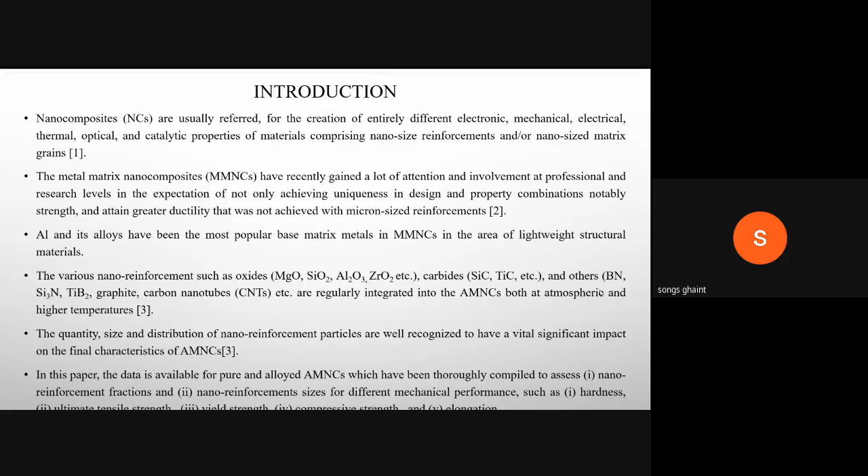And in carbides, we have silicon carbide, titanium carbide, and other reinforcements like boron nitride and titanium diboride. So the defect-free microstructure, particle even distribution, and good properties of MMC have made this matrix important.

Lightweight ductile aluminium is the most preferred matrix material. The reinforcement type, size, volume fraction, and hybrid reinforcement played a significant role in the progress of AMNCs. In this paper, data is available for pure and alloyed AMNCs, which has been compiled to assess the nano reinforcement fraction and size for different mechanical performance, such as hardness, ultimate tensile strength, yield strength, compressive strength, and elongation.

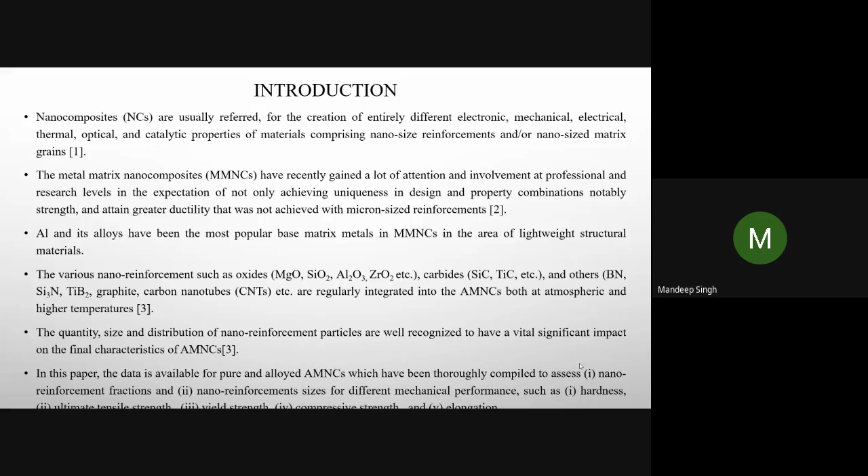So next, in the literature review, we are starting the mechanical properties with hardness. What is hardness? But before that, what are mechanical properties? Mechanical properties involve a reaction to an applied load that determines the range of usefulness of a material. The most common properties considered in this review paper are discussed next.

First is hardness. What is hardness? Hardness is the measure of a material's resistance to localized permanent deformation. The nano-sized reinforcement increases the dislocation density in the base matrix as per the proper particle size distribution. The higher the reinforcement applied, up to an optimal value, the more constraints on dislocation movement there will be. Hence, the overall hardness of AMNC will increase.

Poovazhagan and others revealed a progressive increase in hardness of AA6061-B4C nanocomposites by increasing the nanoparticle volume percentage as 0, 0.5, 1, 1.5, 2, 2.5, and 3. The strong bonding of aluminium with the boron carbide nanoparticle prevents dislocation movement, causing improved hardness to 91 BHN Brinell hardness at 2.5 volume percent nanoparticle, as opposed to 40 BHN of the base alloy.

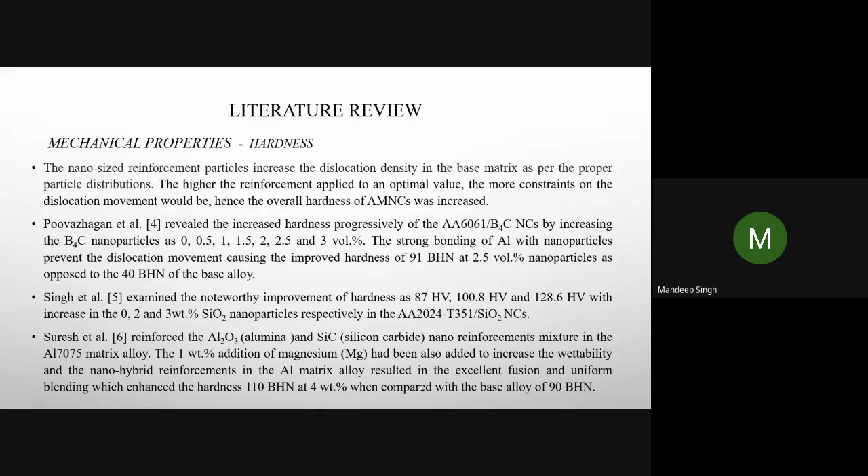Suresh and others reinforced an alumina and silicon carbide nano reinforcement mixture in the AA7075 matrix alloy. A 1 weight percent addition of magnesium was added to increase the wettability of the nano hybrid reinforcements in the aluminum matrix alloy, resulting in excellent fusion and uniform blending, which increased hardness to 110 Brinell hardness at 4 weight percent, compared with the base alloy's 90 Brinell hardness number.

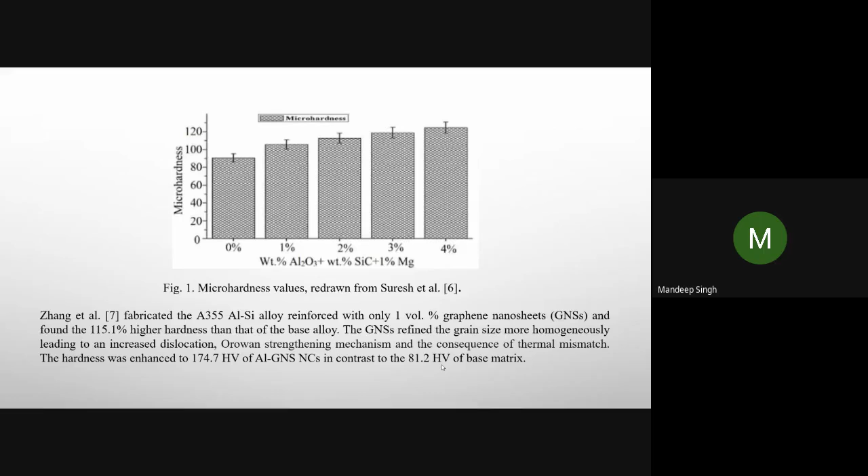Here is a figure which explains that as the weight percentage of nano reinforcement increases, the overall hardness also increases. Next, Zhang and others fabricated an A355 aluminum-silicon alloy reinforced with 1 volume percent of graphene nanosheets and found 115.1% higher hardness than the base alloy. The graphene nanosheets refined the grain size more homogeneously, leading to increased dislocation strengthening mechanisms and thermal mismatch effects. The hardness was enhanced to 174 Vickers hardness for the aluminium-graphene nanosheet nanocomposite, in contrast to 81.2 Vickers hardness of the base matrix.

Then we have the second mechanical property, ultimate tensile strength. What is ultimate tensile strength? It is the ability of a material to resist tearing due to tension, measured in pascals or Newton per meter square. It is found from published studies that the UTS of AMNCs has been strengthened by nano reinforcements. The tight intermetallic bonding causes improved wettability.

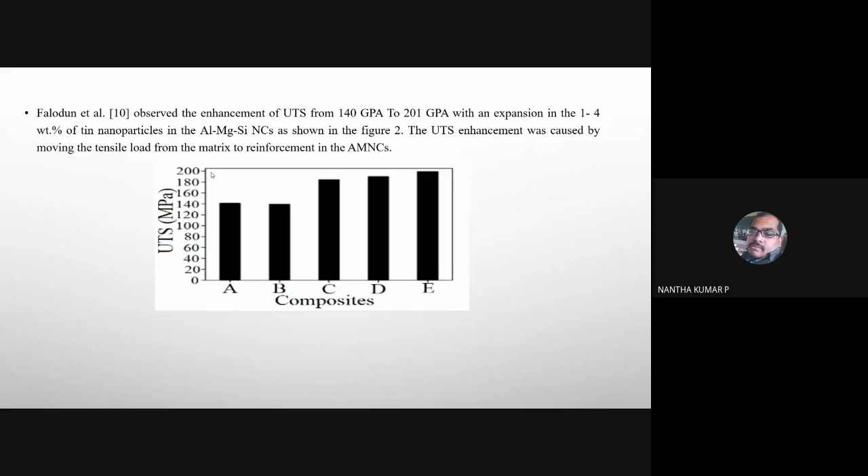Sorry, dear sir. Mandeep, sir, please conclude. Yes, chairperson advised 5 minutes for the presentation. Can you conclude, sir? Sir, it is a reviewed paper, so I have reviewed from different sources. No, no, 5 minutes for presentation, sir. Let others also present. Okay, let me wind up. Yes, please, please. Thank you, thank you, sir.

Poovazhagan and others indicated a 125% increase in ultimate tensile strength of the AA6061 boron carbide nanocomposite in contrast to the base alloy. The boron carbide nanoparticle improved the ultimate tensile strength at 0.5, 1, 1.5, and 2 volume percent.

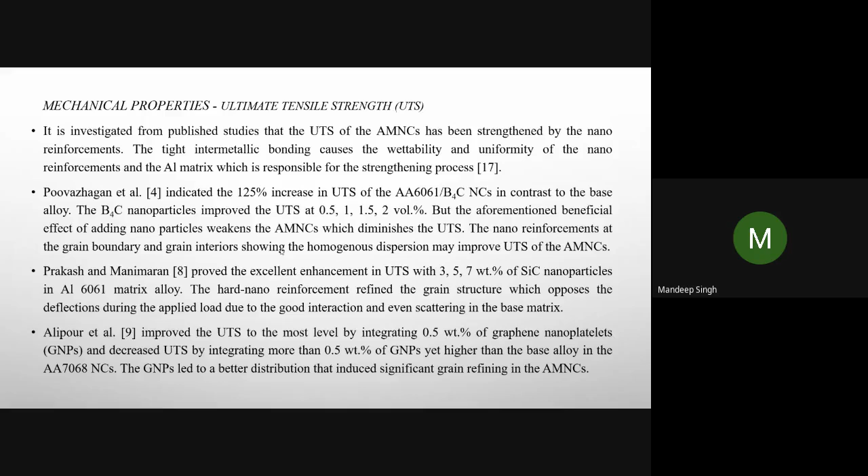The aforementioned beneficial effect of adding nanoparticles weakens the AMNC, which diminishes the UTS. This is due to the high dislocation density and the interaction of dislocations with the ultra-fine nanoparticles. The nanoparticles at the grain boundary interior show homogeneous dispersion, which improves the UTS of the AMNC.

Coming to yield strength - what is yield strength? It is defined as the maximum stress that a solid material can withstand when deformed within its elastic limit, or it can be defined as the stress at a point where the stress-strain curve deviates from proportionality. That is the yield strength of the material.

Li and others made use of titanium nitride nano-reinforcement particles by varying the weight percentage at 1, 2, 3, and 4 in the Al2024 alloy. The increasing titanium nitride content improved the yield strength up to 3 weight percent, and the maximum value was recorded at 2 weight percent, that is 730 megapascals, which was 185% higher than the baseline.

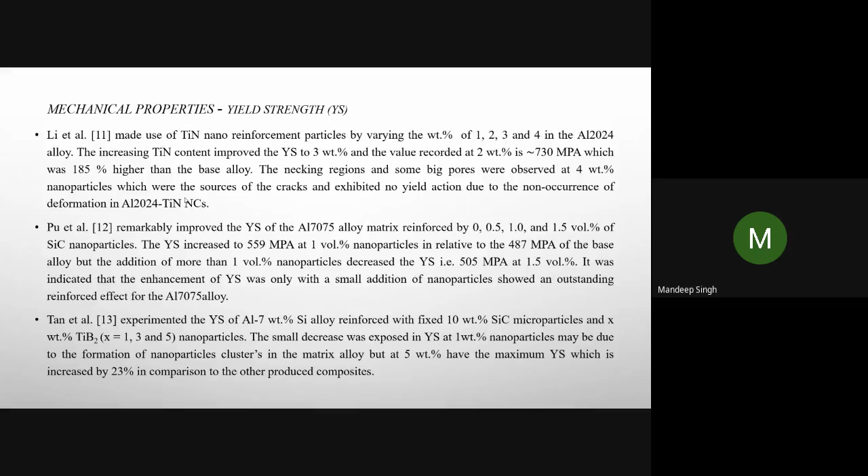The reason is that necking regions and some large pores were seen at 4 weight percent nanoparticle content, which become the source of cracks and show no yield action due to the non-occurrence of deformation in the Al2024 titanium nitride nanocomposites. Then the next mechanical property we have is compressive strength.

What is compressive strength? It is the maximum amount of compressive stress that a material can withstand before it breaks or fractures. Izadpur and others studied 0.4, 0.8, and 1.28% of aluminum oxide nanoparticles in the...

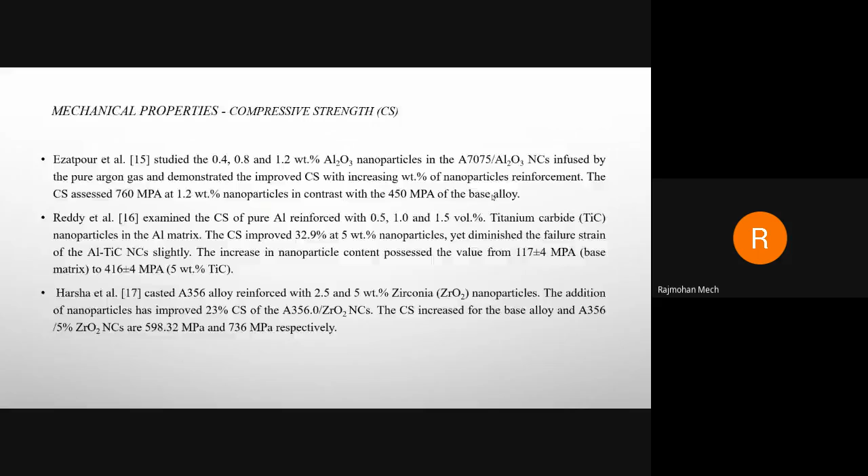Sir, please conclude yourself, sir. Okay.

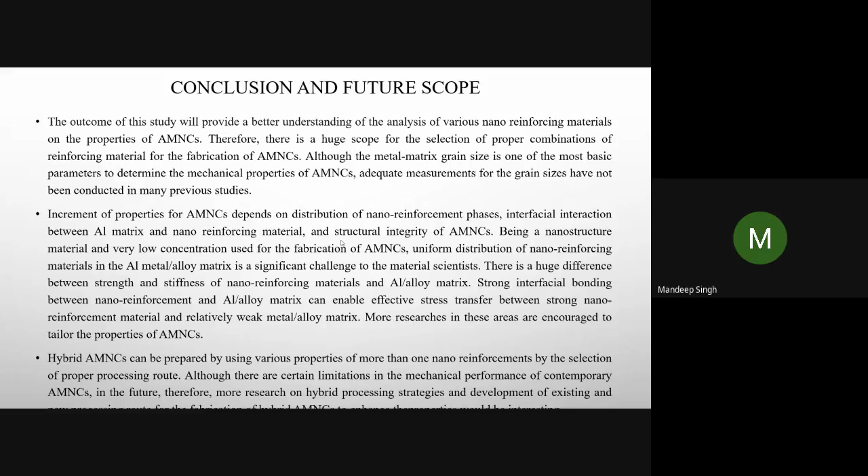Okay, please. Sir, have you compared any properties with micro and nanoparticles for the presentation? Have you shown any slides regarding comparison of micro and nanoparticles? No sir, I have not prepared that comparison of mechanical properties. I have just reviewed the properties regarding the disadvantages of microparticles. You should investigate what are the advantages of nanoparticles over microparticles by comparing - so many comparisons are available in literature. Then it will be a better study. Okay, sir, I agree.

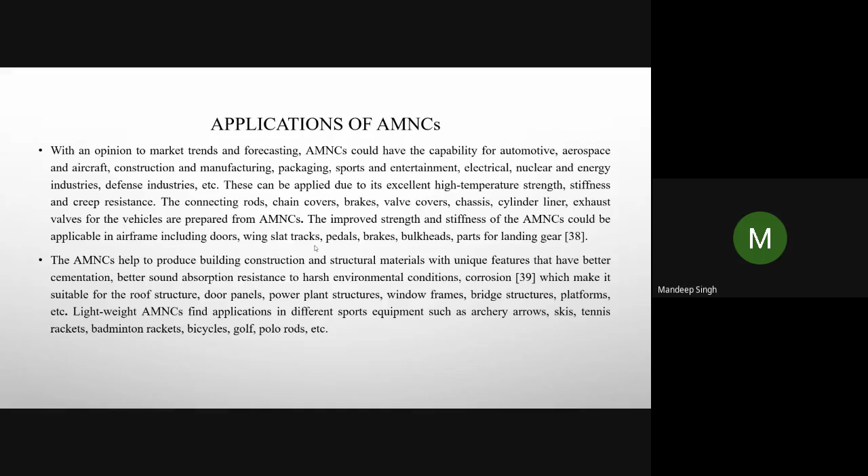Just one question: whether the nanoparticle will act as a filler or reinforcement? Sir, nanoparticle acts as a reinforcement. Then what is the difference between filler and reinforcement, sir? Sorry sir, it can be... Okay, okay sir, no problem.

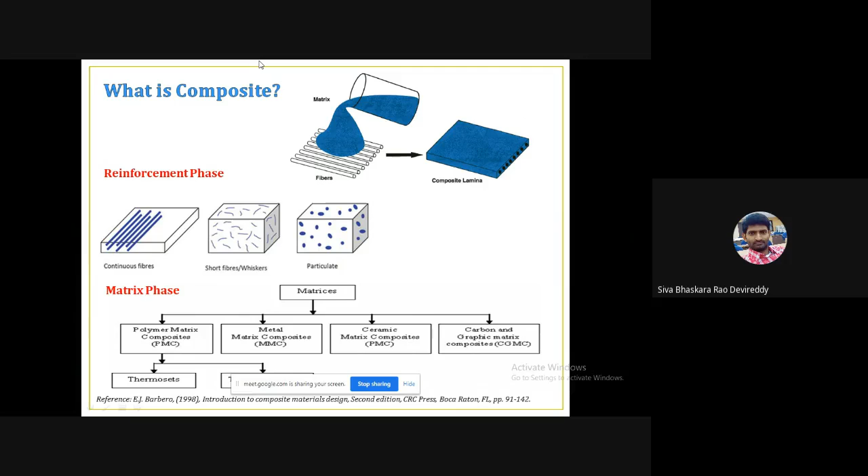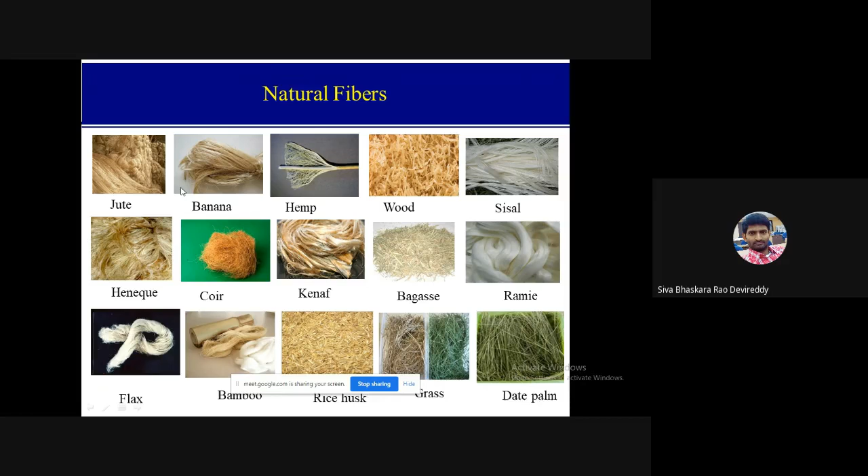Coming to this reinforcement phase, these are either synthetic or natural fibers. Our main focus nowadays is due to environmental concern, many researchers are working on natural fiber reinforced composites. This slide represents different natural fiber reinforcements available in nature. Examples are jute, banana, hemp, wood, sisal, heneque, coir, kenaf, bagasse, ramie, flax, bamboo, rice husk, grass, date palm. So many natural fibers are available in the literature.

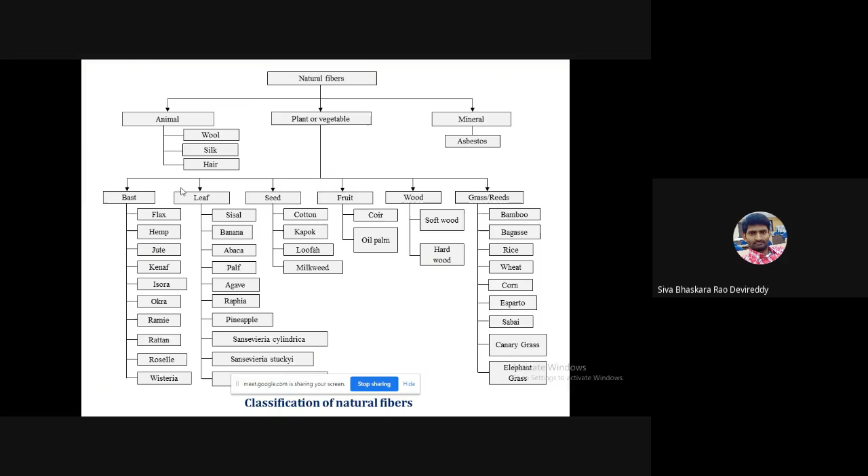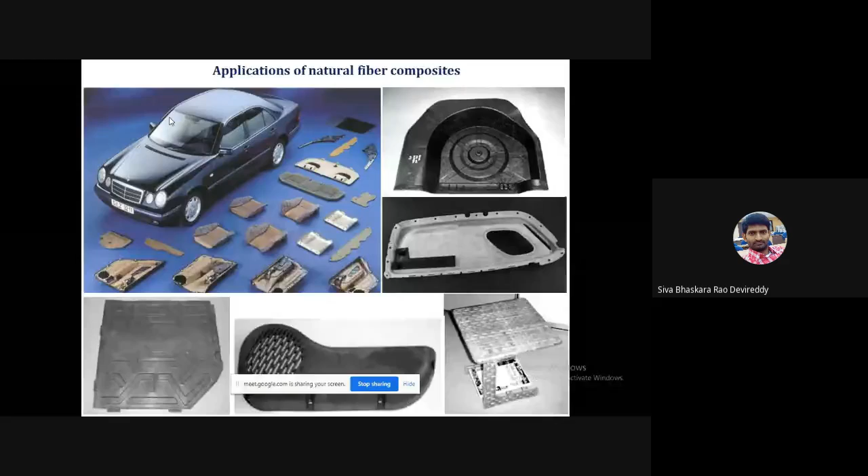Out of these natural fibers, we selected for our research work broom grass root fiber as one of the reinforcement materials, because broom grass root is available in countries like Bangladesh, Nepal, India, China, and Thailand, and possesses high aspect ratio and high toughness compared to other natural fibers. So we selected this broom grass root as one of the reinforcement materials to fabricate the composite.

The main properties considered to select the broom grass root are low elongation at break, low density, high specific stiffness, and strength as compared to other natural fibers.

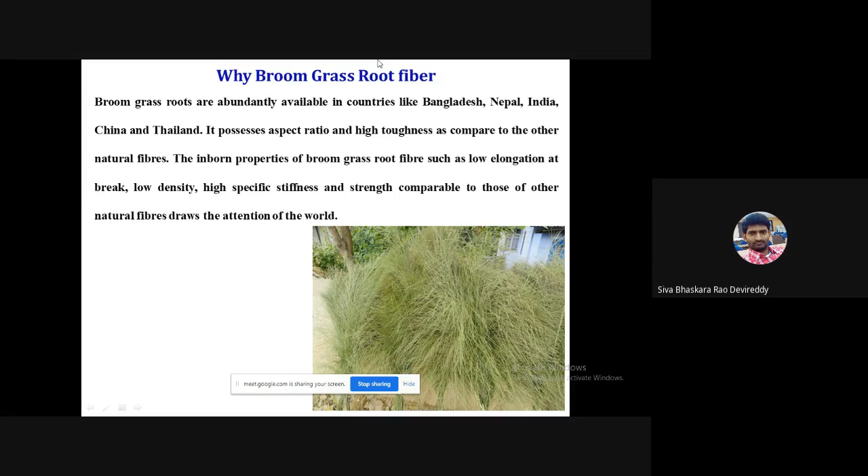The main objective of this present work is to fabricate different sets of broom grass root and glass fiber reinforced polyester composites to study the physical and mechanical properties, such as density and water absorption for physical properties, and tensile strength, tensile modulus, impact energy, and hardness for mechanical properties. Another objective is to study the effect of glass fiber content on these properties.

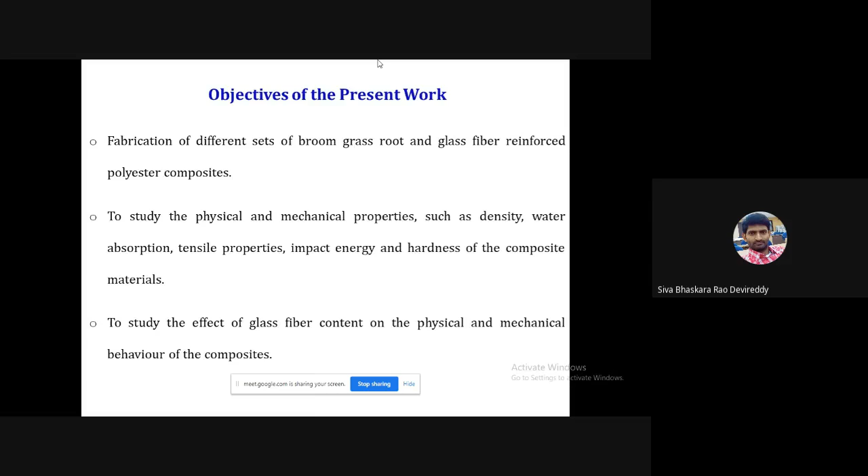Coming to the materials selected to make the composite, polyester is the matrix material we selected. The polyester and corresponding catalyst and accelerator were purchased from Ecmass Resin Private Limited, Hyderabad.

The density of this polyester is low as compared to the epoxy, that is 1.13 gram per centimeter cube.

Broom grass root is selected in particulate form. Initially, the broom grass is collected from local sources, washed with clean water, and made into powder form as particulate.

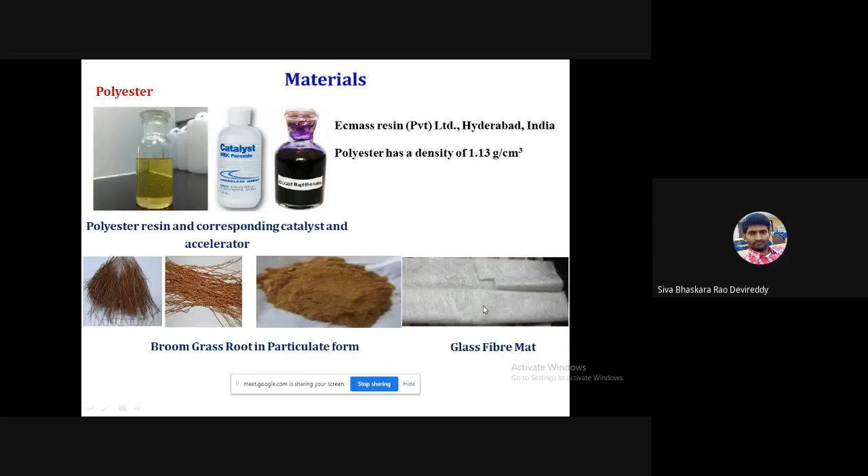Another reinforcement material selected is glass fiber mat. Using these two reinforcements and polyester matrix, the composite is fabricated by hand lay-up technique followed by light compression molding. For curing this polyester, the catalyst and accelerator were mixed at 1.5 weight percentage each.

After mixing the polyester with catalyst and accelerator, the broom grass root particulate is added into the polyester resin, and the glass fiber was placed layer by layer. Using this hand lay-up technique, the composite is fabricated.

Initially, the polyester is applied over the mold and the glass fiber mat is placed in such a way to achieve 4 mm thickness for the fabricated composite.

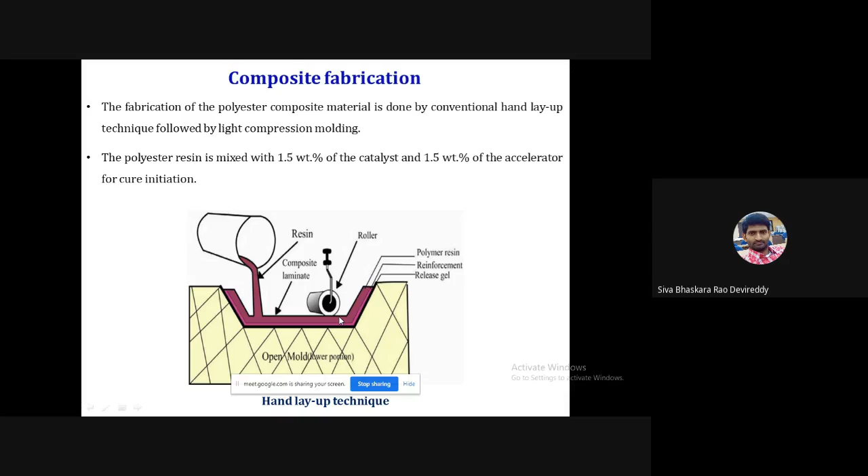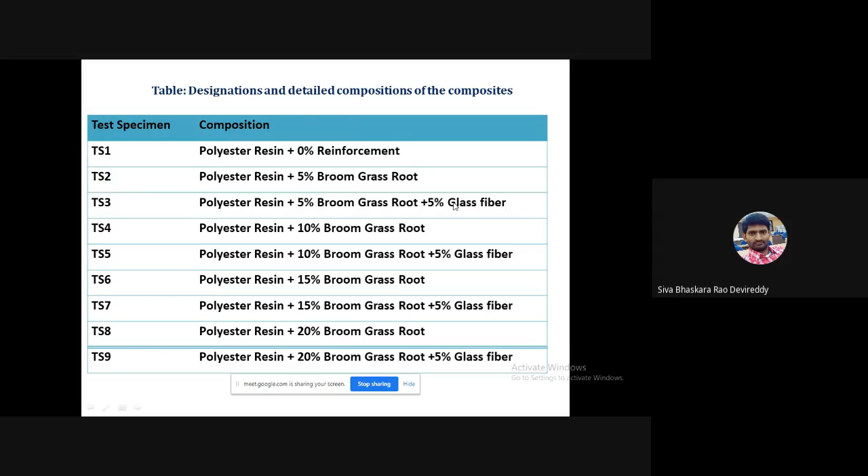Total 9 sets of composites are shown in this table, fabricated using the hand lay-up technique.

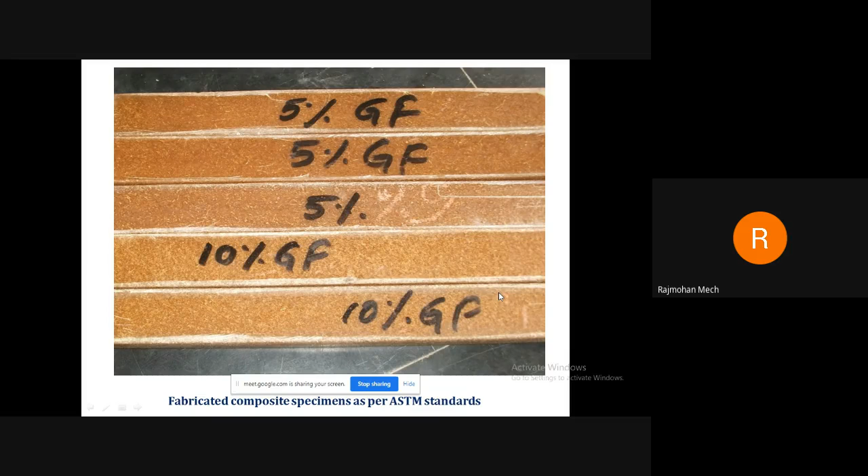Sir, 5 minutes is allowed for presentation, sir. Please. Okay yes sir, yes sir. Go ahead, you've wasted your time giving introduction and other applications. Directly go to results and discussion. Yes, conclude sir, because other participants are waiting. Yes sir, 2 minutes it will complete, sir.

These are the fabricated composites with different percentages of broom grass root and glass fiber.

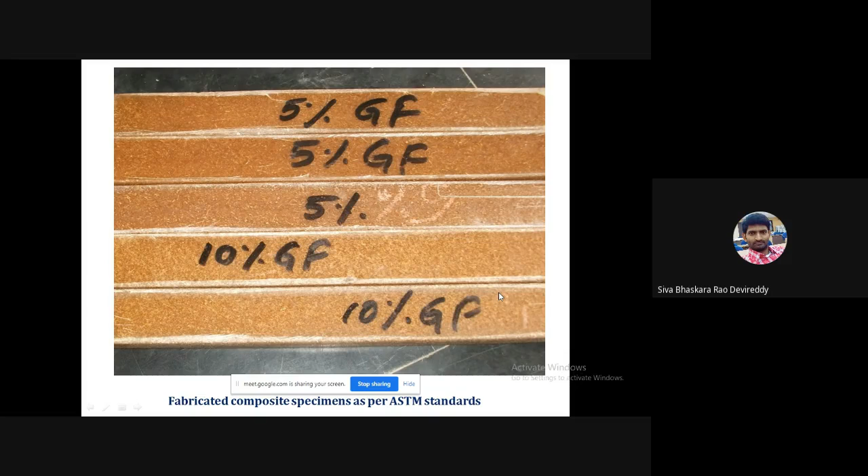Next, coming to characterization, density and void content were calculated. The theoretical density was calculated using equation 1, written by Broutman and Agarwal, and experimental density was calculated using the Archimedes principle.

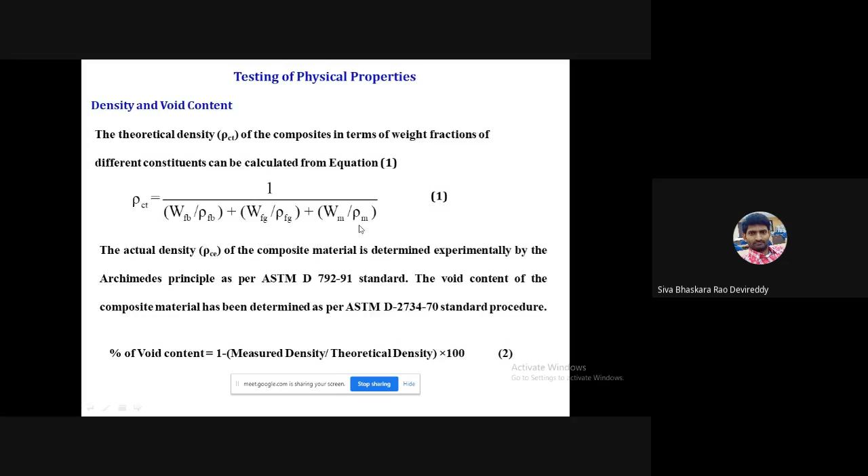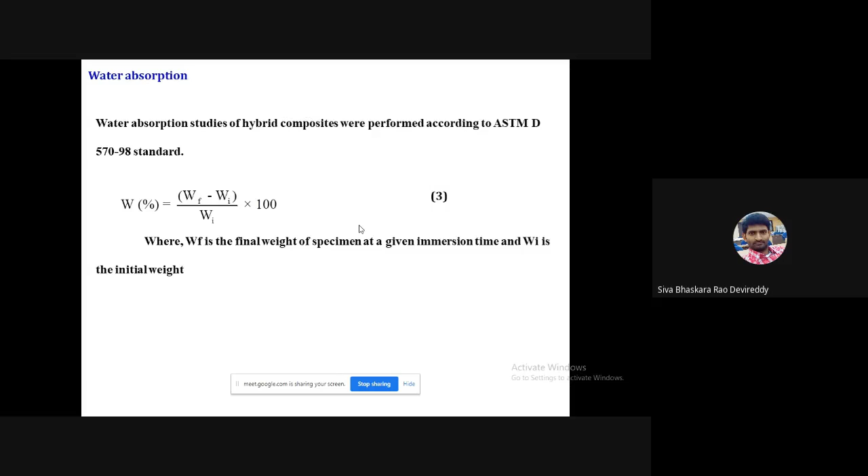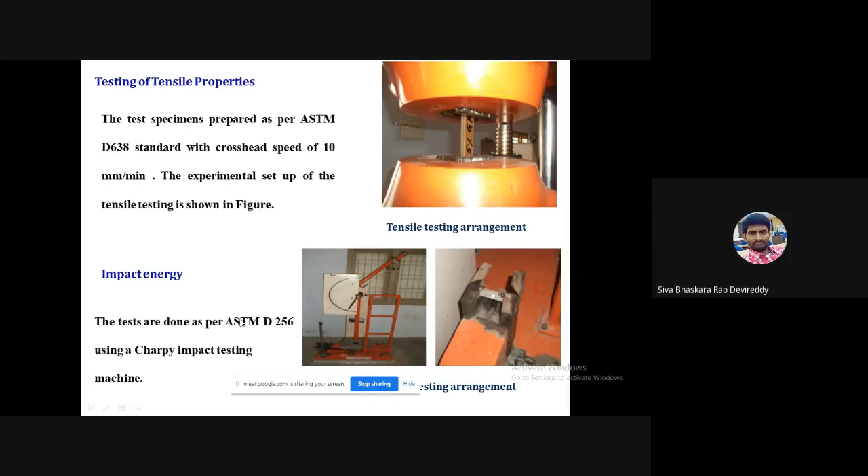Water absorption of the composites was performed as per ASTM standard D570 98. The difference between the specimen's weight before and after immersion was calculated using this formula. Tensile test was conducted on UTM as per ASTM standard D638, impact energy was performed on a Charpy impact tester as per ASTM D256, and Brinell hardness was measured using the Brinell hardness tester formula.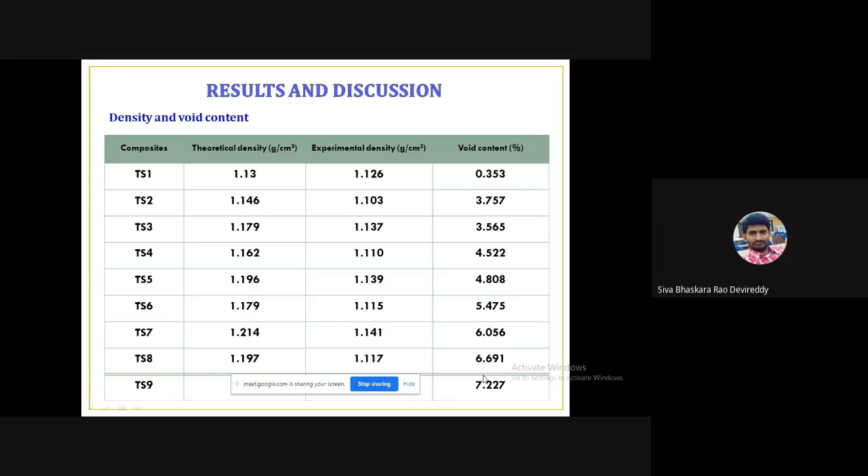Water absorption of the composites also increases with respect to immersion time. The maximum water absorption was observed for the composite TS8, which has 20% broom grass root without any glass fiber.

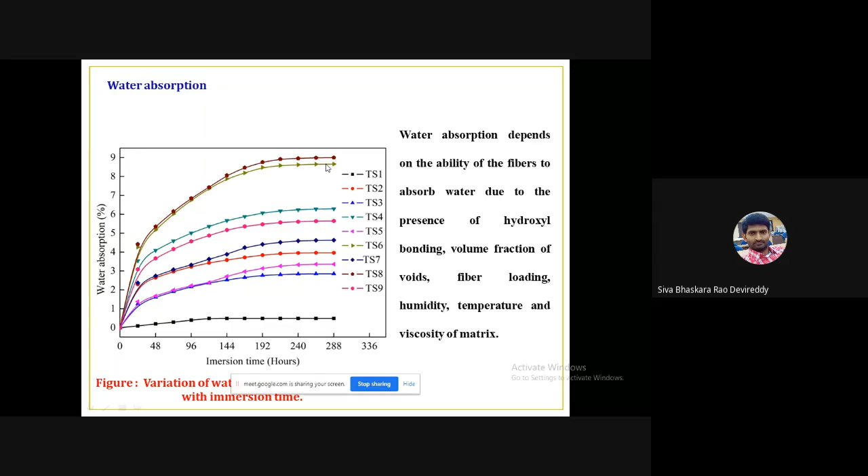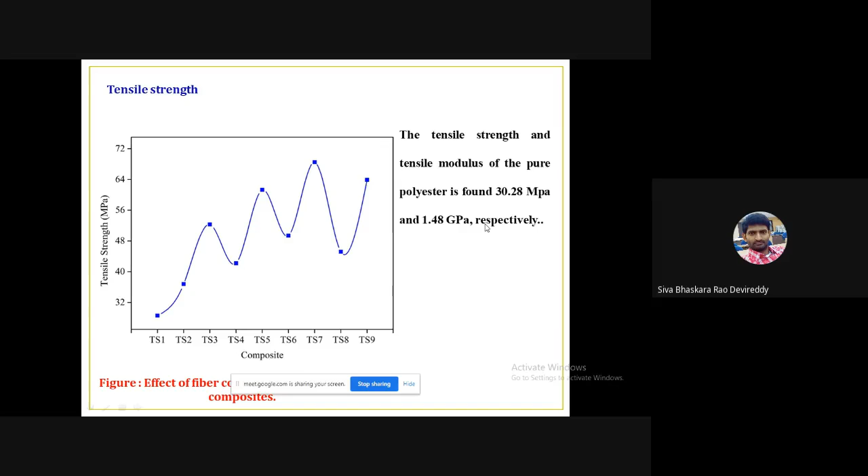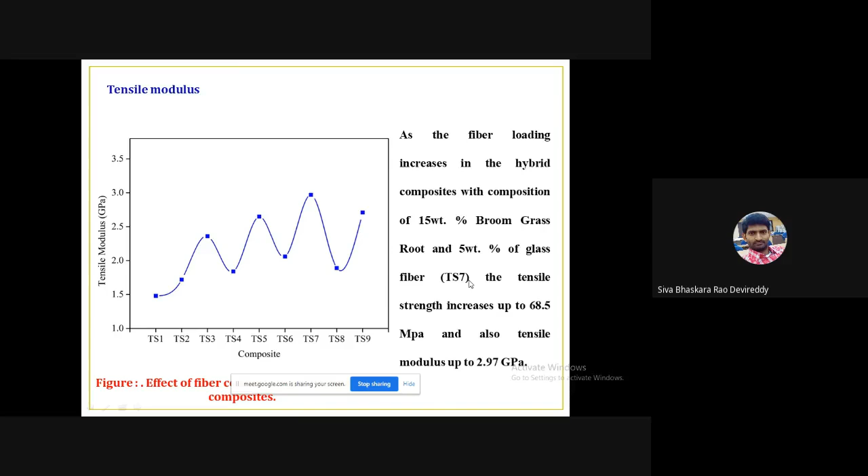Tensile strength of the composite: here we calculated tensile modulus and tensile strength. Initially, neat polyester has a tensile strength of 30.28 MPa and tensile modulus of 1.48 GPa. When adding the reinforcement phase, tensile strength and modulus both gradually increase, with maximum tensile strength found at 68.5 MPa and tensile modulus increasing up to 2.97 GPa at 15 wt.% broom grass root and 5 wt.% glass fiber. This composite specimen, designated TS7, has higher tensile strength and modulus compared to other specimens.

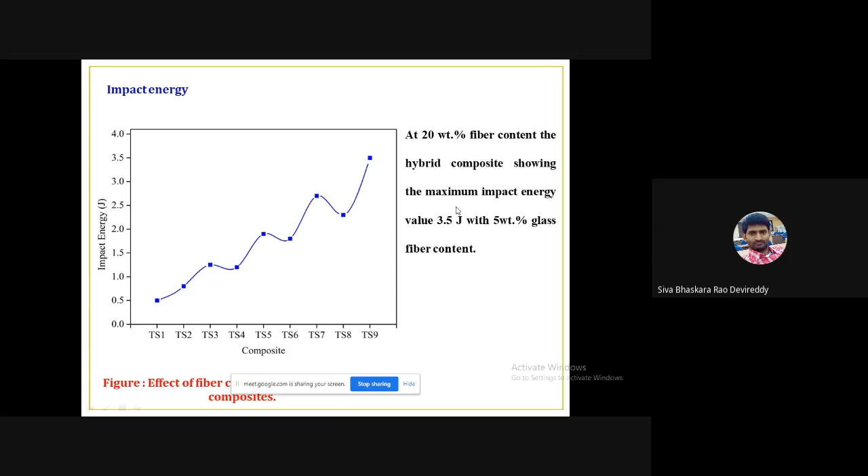Impact energy gradually increases with respect to fiber loading, with maximum impact energy found at 3.5 joules. Similarly, Brinell hardness also increases, with maximum hardness found at 97.94 Brinell hardness number.

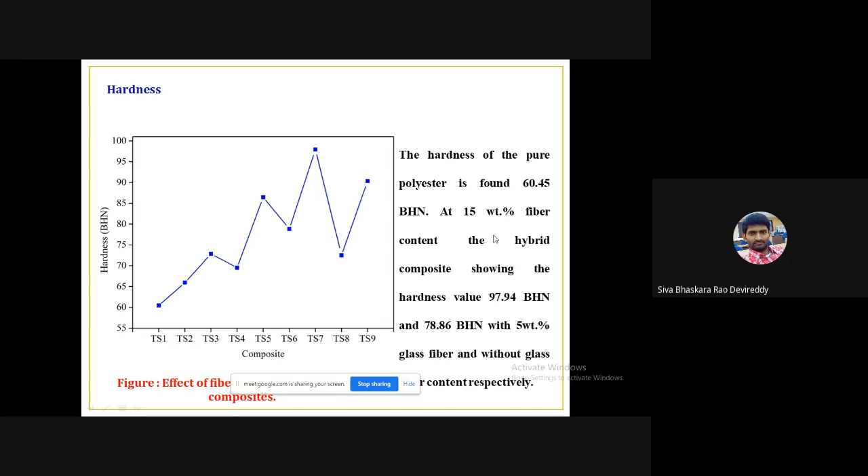At 15 wt.% broom grass root and 5 wt.% glass fiber. Sir, kindly conclude yourself, you are exceeding the time, please.

These are the conclusions: the void percentage increases, the maximum water absorption is found to be 8.99%, the maximum tensile strength is 68.5 MPa, the maximum tensile modulus is 2.97 GPa, and the hardness and impact energy values are found to be 97.94 Brinell hardness number and 3.5 joules.

Compared to this neat polyester, adding broom grass root and glass fiber gives better values as compared to the neat polyester. Adding broom grass alone also has some less impact on these properties. The combination of glass fiber and broom grass gives the maximum properties as compared to the other two.

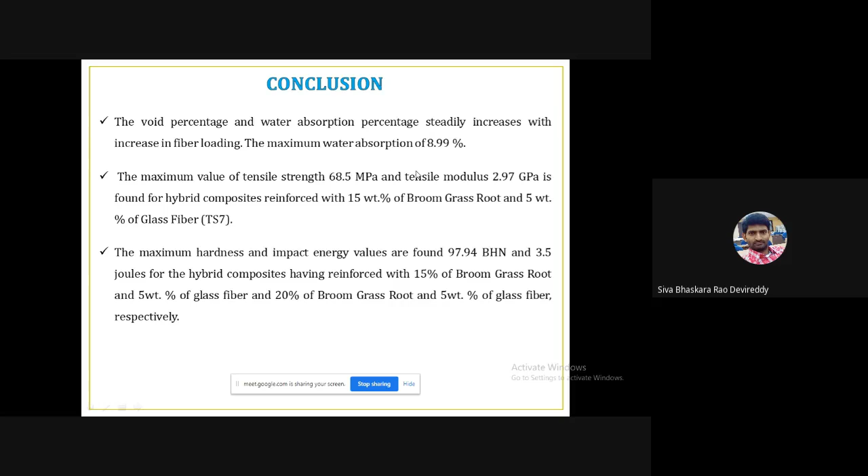Actually, you have fabricated hybrid glass broom grass fiber, but you have not shown any microstructure, because by seeing the microstructure only we can confirm the presence of the fiber and the glass fiber, and whether there is uniform distribution or fiber pull out available.

Yes sir, you have missed that part. Main part is the tensile testing. You are doing material science, without microstructure we cannot do anything. So the major part is missing in the presentation.

Tensile, flexural, these are all experimental work. By seeing the microstructure we can give comments, and you should prove the presence of glass and other particles in your fabricated specimen.